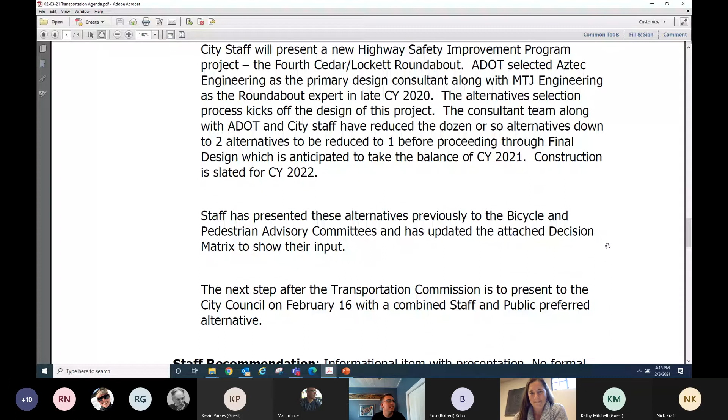Perfect, thank you. I think we cover most of what's here in the agenda in our presentation. Jeremy DeGeyter and I - Jeremy's in the Capital Improvements Group - are going to tag team this presentation. A couple of you attended the Bicycle and Pedestrian Advisory Committee combined meeting a couple weeks ago. We did essentially the same presentation, got some really good input, lots of questions. That was a really useful meeting.

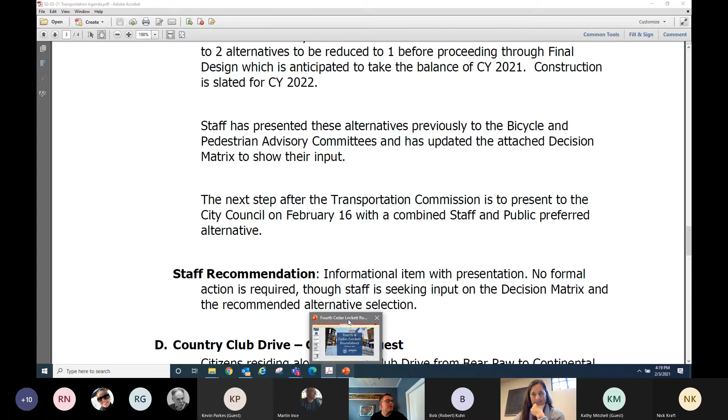So we'll run through this - it's a lot of slides, we'll try not to go too slow. If you have questions as we bounce through the slides, just stop us rather than having to go back later and find the slides. When we get to the end, we have a decision matrix where we've made an attempt to score the alternatives, and as the chair mentioned, that's what we're looking for - your input on the decision matrix so that we can have a preferred alternative heading to City Council here in 2 weeks from yesterday. That's our goal. With that preferred alternative and concurrence from City Council, we'll be able to turn our designer loose on the rest of the design for the project. So exciting spot to be at.

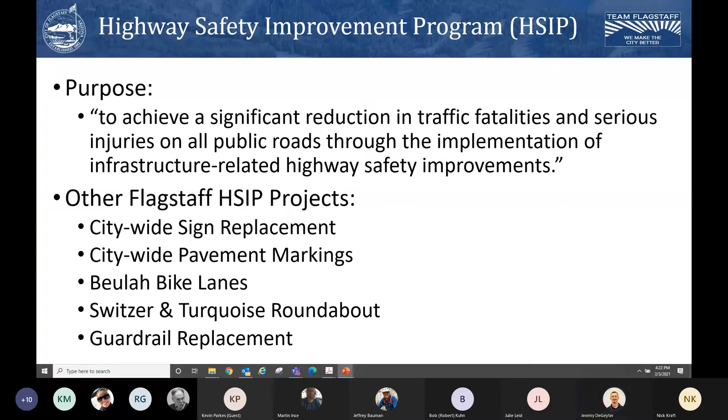A quick overview of this grant process: it's a competitive process administered by ADOT, as they administer the federal dollars. Back in 2018, the City of Flagstaff applied to ADOT and we were selected, receiving a notice of award. After that, it went to the Metro Plan's Technical Advisory Committee and Board, who implemented it into their Transportation Improvement Program, or TIP.

From there, we drafted an IGA, an intergovernmental agreement, between ADOT and the City of Flagstaff. This IGA was approved by City Council at the May 19th, 2020 City Council meeting. From there it goes to the ADOT State Transportation Board for approval, and then ADOT oversees the administration of the design and construction.

ADOT has hired the designer, in this case Aztec Engineering Group, and that's the phase we're in right now: design. Eventually, the city will be responsible for acquiring right-of-way, and ultimately ADOT will hire the contractor and administer construction of the project.

A quick overview of where this project is located: at the intersection of 4th Street, Cedar Avenue, and Lockett Road. 4th Street runs north and south, while Cedar Avenue and Lockett Road run east to west.

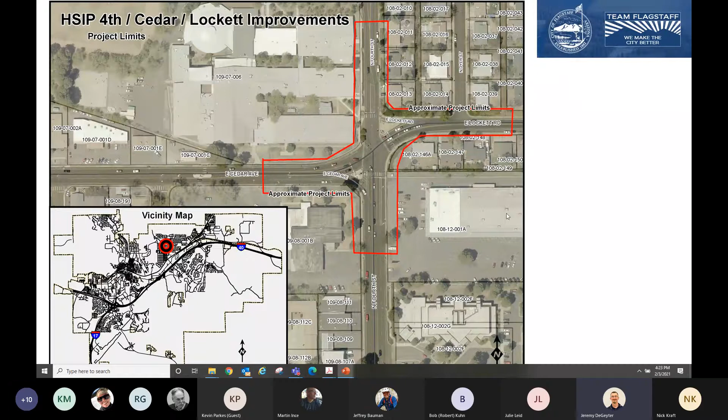For further orientation, on the northwest corner we've got Mount Elden Middle School, or MEMS. On the southwest corner, we've got Pine Forest Charter School. And on the southeast corner, we've got the CCC campus and the East Flag Library.

This is the early schematic design that was submitted along with the grant application.

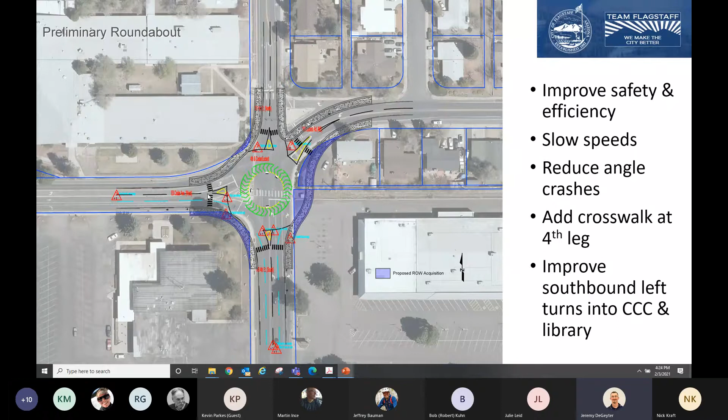The primary objectives of seeking this grant award were to improve the safety and efficiency of the current signalized intersection. This would be achieved by slowing speeds through a roundabout, significantly reducing right-angle crashes. It would add a crosswalk—currently we're missing a crosswalk on the 4th leg—and it would also help improve southbound left-turn lanes into the CCC and library property.

As for financial impact, the total HSIP grant award is roughly $1.9 million. The city also contributed roughly $60,000 in matching funds.

Ultimately, we'll be moving into construction hopefully later in fiscal 2022, and that's when the bulk of the money will be released for use. The primary thing I want to point out here is that the city is responsible for any project costs in excess of the current grant award, which will become more important as Jeff walks you through the alternatives, since there are significantly different costs involved with right-of-way acquisition.

And with that, I'll turn this over to Jeff, who will talk you through the basics of roundabout design and considerations.

And as I mentioned at the end of the presentation, we have a decision matrix with a bunch of rows to score different characteristics of traffic flow, pedestrian flow, bicycle flow, right of way, and all sorts of things. With the presentation, there's a couple handfuls of slides to go through these things, trying to educate and inform you on the types of things you'll see in the decision matrix.

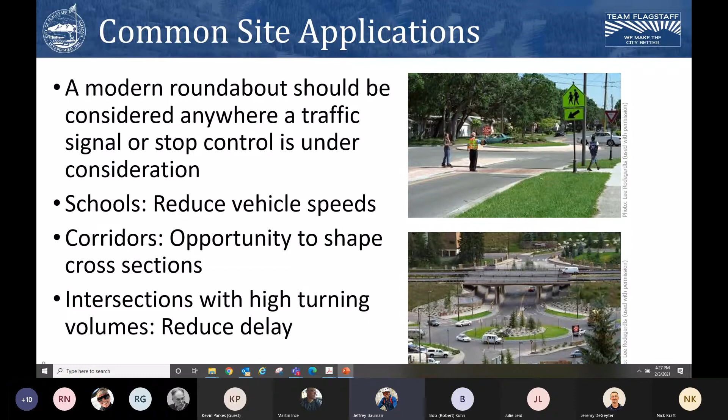Roundabouts do a really good job with left turns, which are really a problem at a traffic signal—they take up a lot of time, and there can be a lot of right angle crashes. Roundabouts do a great job with high turning intersections or high turning locations.

Key objectives: slow entry speeds, as I mentioned before, really low operating speeds. The appropriate number of lanes is really important for roundabout design—is it a 2-lane entry, which is more complicated for drivers and pedestrians, so we're always trying to limit to 1 lane if possible.

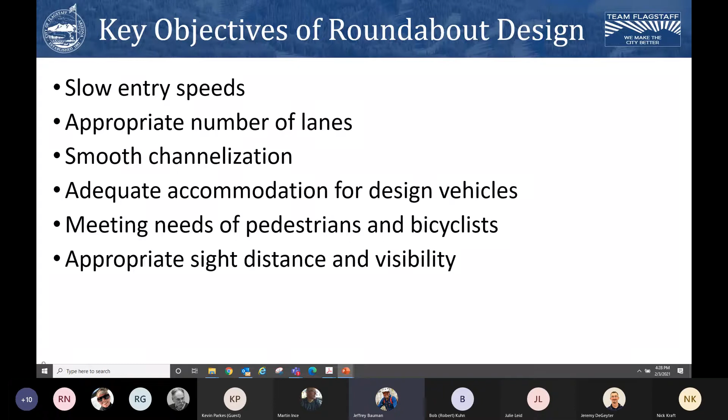Smooth channelization—we want really nice smooth flow. Adequate accommodation for design vehicles, which are typically the bigger vehicles, for example buses and large semis in this location. We always want to meet the needs of pedestrians and bicyclists, which we'll go through in some detail. And then appropriate sight distance and visibility, an important design consideration at all intersections.

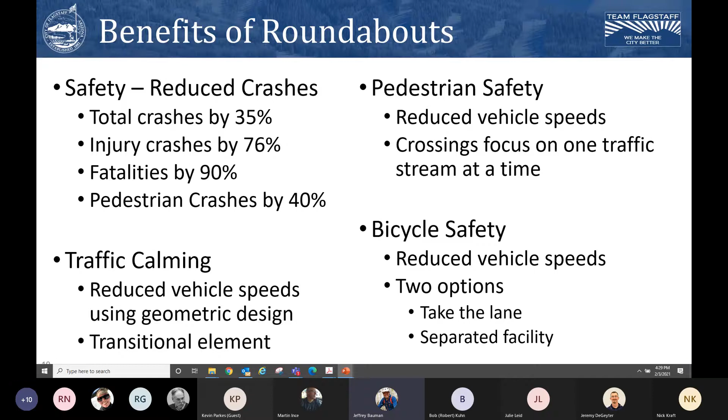Traffic calming—again, reduced vehicle speeds. That's a theme of roundabouts, and they can be a transitional element from one land use to another. And finally, bicycle safety—again, vehicle speeds play such a critical role in roundabout design. With bicycles there are two options: the bicycle can take the lane, a share-the-lane opportunity, or exit into a separated facility, as we're proposing in this design. I'll show some pictures of those.

More benefits: lower overall delay than other controlled intersections. In this early analysis of this location, each of the roundabout options we're looking at performs better than the traffic signal as far as delay for vehicles.

Specific users do not receive priority. So we're looking for gaps—all modes are looking for gaps in traffic before they enter the roundabout, yielding on entry, as opposed to assigning right-of-way like a traffic signal where people wait until it's their turn by that assignment.

Typically you see lower operating and maintenance costs. Average costs you find are about $10,000 for traffic signals, for ongoing maintenance of the equipment and electricity. A lot of those costs are not borne with a roundabout.

Another interesting thing here: roundabouts don't require long turn lanes. At a lot of intersections in urban areas you see lengthy left turn lanes, sometimes dual left turn lanes, right turn lanes. Typically you don't see any of those things at a roundabout. So while the roundabout takes a little more space at the intersection itself, overall it may not actually need more right-of-way than a traditional intersection.

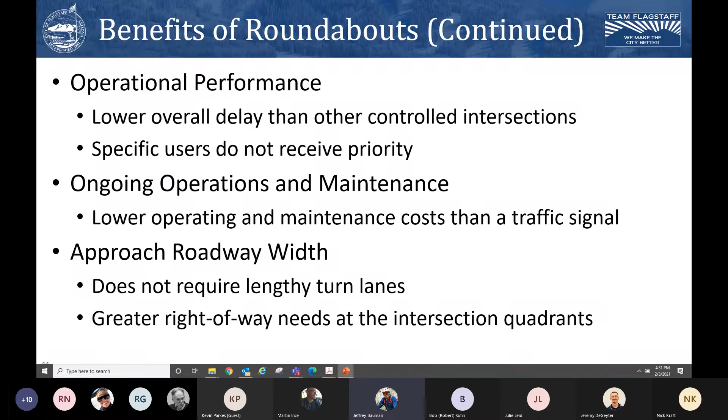Some environmental benefits with that reduced delay. The fuel consumption is typically lower, and air quality or emissions are typically lower, and there's typically less noise because you're not stopping and starting from zero. You're yielding on entry, so cars are moving slow into and out of, which means a little bit less noise.

Access management. Roundabouts are often used with access management, where we're restricting turns in and out of driveways, typically left turns. If you restrict left turns into and out of driveways, then you need to provide a spot for people to make a U-turn, so roundabouts are often used for that.

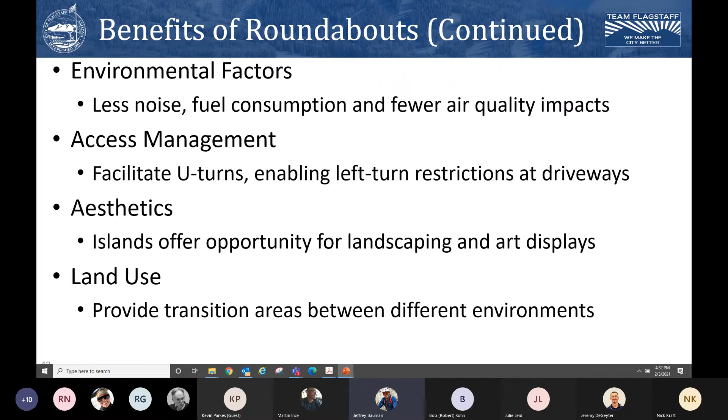Aesthetics, islands - you've probably all seen roundabouts with really nice central islands. That's actually one of the things that varies between our different alternatives that we'll take a look at. And then again, there's the transitional piece between different land uses.

Going into a little more detail, though I've kind of already touched on this - motorist considerations, there's improved safety. Part of that is because you're allowed more time to make decisions, to act and react because of the lower operating speeds and the reduced number of directions of conflicting traffic. As we were talking about with pedestrians, vehicles have just one conflict point - you're always looking left as you yield on entry - as opposed to a traffic signal where you may be judging several movements, significantly more conflict points with a traffic signal than a roundabout.

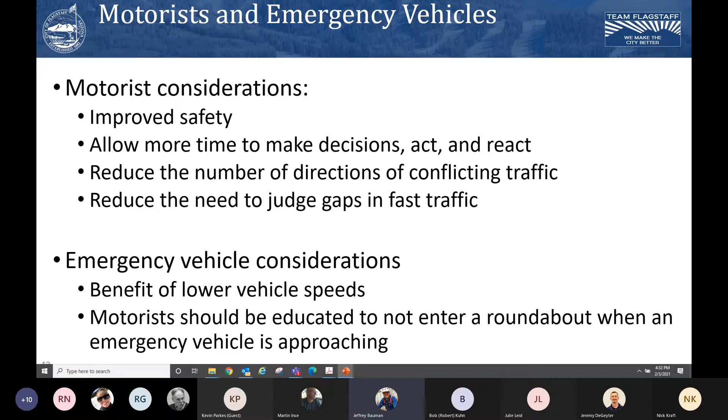Emergency vehicles benefit from the lower vehicle speeds. One thing that's important is that motorists should be educated not to enter a roundabout when an emergency vehicle is approaching, so as not to lock up the roundabout.

Pedestrian characteristics: again, one direction of conflicting traffic at a time, and we have lower vehicle speeds. There can be challenges for pedestrians with vision impairments, like at many other locations that don't have signal control - stop intersections and other places also have some of these difficulties.

Bicyclists can navigate roundabouts either as a motor vehicle taking the lane, or there are exit ramps to get into the separated protected facility, whichever name you'd like to use for it - a wide sidewalk that goes around the intersection. We'll look at some pictures of that here in a moment and talk about how bikes can traverse a roundabout.

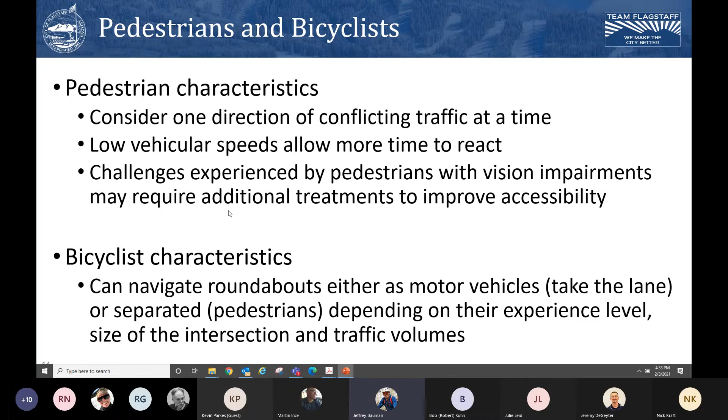Here's an exhibit with a typical roundabout corner. Sidewalks at roundabouts should be set back from the circulatory roadway, as you'll see in our designs. This is the sidewalk - typically we're looking at a wide sidewalk of about 10 feet, which is what we have in our designs to date. Then we have a buffer, often about 5 feet, which I believe is what we're looking at in some of the quadrants. That's one of the differences between the different roundabout concepts we'll look at - some have the buffer, some do not.

Separation improves comfort and also can discourage pedestrians from going to the central island. Some early roundabouts in the United States had really nice things in the middle, statues and whatnot, and we've had some issues - not in Flagstaff, but in other places - with pedestrians going out to take pictures.

The really important thing for safety: crossings are always one direction and typically one lane. So as a pedestrian, if you're on this side you're looking left, you just have one approaching lane to negotiate to find the gap. Typically the crosswalk is placed one vehicle length back from the yield line for the vehicle entering the roadway. The idea is that a vehicle crosses this conflict point with the pedestrian and then has time to react to the conflict point with the circulating vehicles. If they're waiting here to enter, they're behind the crossing - there's a couple of different things going on there that make it really important to get that one vehicle length right.

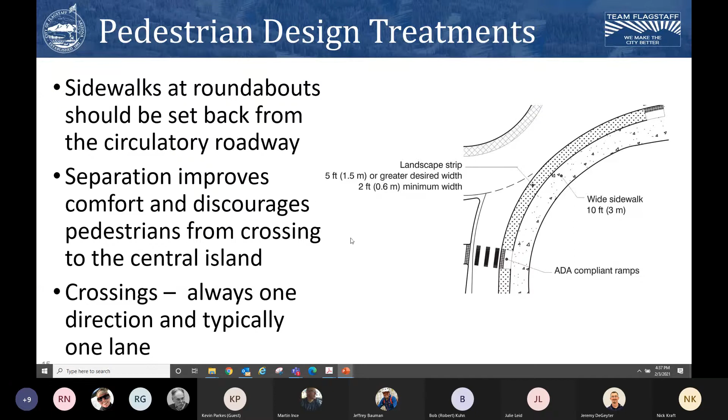So that's taking the lane, traversing the roundabout as a vehicle. We don't have any images in Flagstaff of this, but we'll see examples later in the presentation where shared lane markings go in the roundabout and the approach lane to reinforce to both drivers and cyclists that this is the place to be. If you're not comfortable with that option, there's an exit ramp essentially.

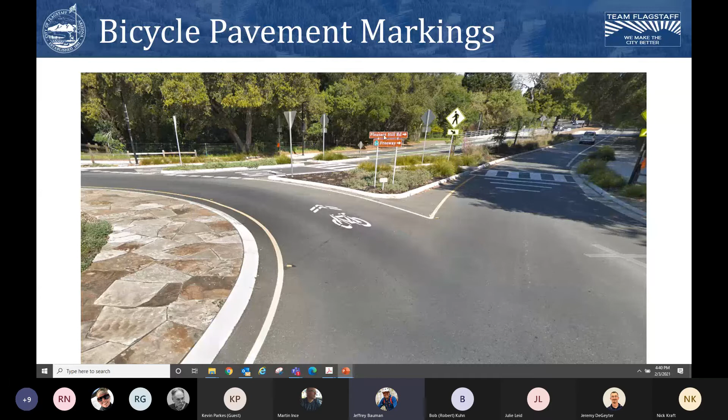You can see here the shared lane marking in the middle of the road in the circulatory roadway, and over here they've actually added the word legend 'yield' as you come up to the yield line. So there's an example of some of the signs, Commissioner Kraft, that you were asking about. Here's also some signage telling you to the freeway, and this must be Pleasant Hill Road—these signs are somewhat optional, but we tend to use them as well.

Here's another couple of examples. This is called a protected intersection, where the bike lane is buffered from the road with this hatched out area. Similar to the roundabout, the bike lane would come up onto the sidewalk, and when it gets this extra width, it becomes kind of a multi-use path.

This is a bit complicated with all of the green, but you can kind of see what cyclist paths would look like if you were going straight through. You'd follow the green, go through this crosswalk because that's a pedestrian conflict, and then head out this way.

This is a protected intersection, so it's not quite the way a roundabout would look, but the concept we liked is that in the roundabout we actually stripe the bike way a little bit different than we do the crosswalk. So we have a pedestrian section and a bike section in the crosswalk area. It's a concept we like from this protected bike lane, protected intersection concept.

Over here on the right is another example where the bike lane is potentially buffered or protected from the road. Instead of being an on-street bike lane, it's an off-street bike lane adjacent to the sidewalk. You can see in this concept the bike can use the crosswalk here or circulate around, whether it's combined with the sidewalk or at a different elevation, and then cross here. So I think we can incorporate maybe one or both of these concepts into the typical roundabout bike markings where you just have the crosswalk.

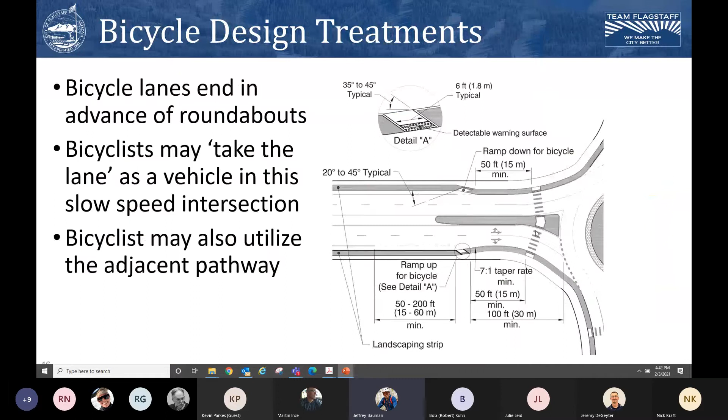So we're kind of excited to try introducing some of these concepts to Flagstaff. These are not very widespread at this point, so that'll be kind of fun to be one of the first to introduce some of these concepts.

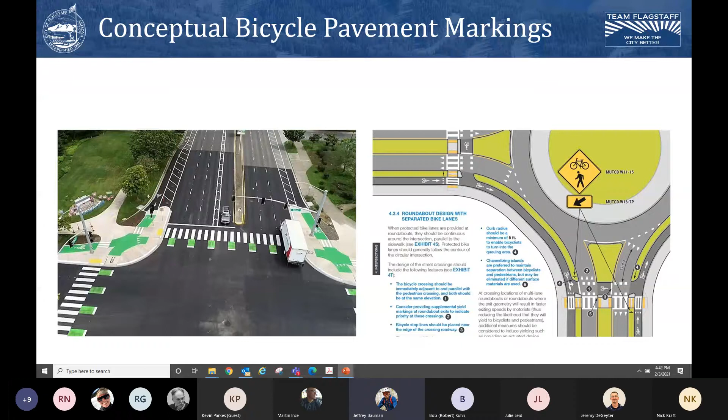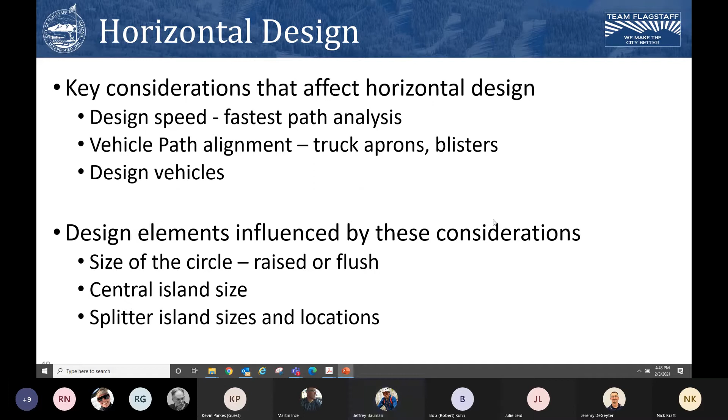Horizontal design, key considerations, again, design speed. It's all about design speed and reducing conflict points, which is what makes roundabouts so much safer than traditional intersections. Size of the circle, central island size, splitter island size—we'll look at all those things when we get into some of these examples, and here we go.

The designer has been working for a couple of months now and has come up with a dozen or more alternatives. Here's a couple of the alternatives, and these particular exhibits are showing how buses on the left and trucks on the right traverse the roundabout. So let me walk you through this a little bit—they're small, but just to give you an idea of what's going on.

You can see in this example the bus working its way around to make a left turn around this central island. This central island in the dark area is non-traversable—this is the potentially landscaped area. Then this lighter gray is what we call the truck apron, the sloped area that we expect trucks and buses to have to traverse.

The reason we have that is to keep the circulatory roadway for all the other vehicles skinny to help control speeds. If we built the island way back here, we'd have really high speeds for vehicles because it'd be just a straight shot through the intersection. So that's the balance going on here. You can see in this exhibit the truck actually runs over the landscaped area—this is still an early design concept where we haven't quite adjusted all of these areas yet for these design vehicles.

Just another example of some of the truck and bus movements through one of the other concepts. This is a double roundabout, and you can see this roundabout is all light gray, meaning it's fully traversable. Similar to what we built at West and Arrowhead, the central island is actually fully traversable and painted—essentially, not quite paint, but like paint. This island has some landscaped area but is traversable on the edges.

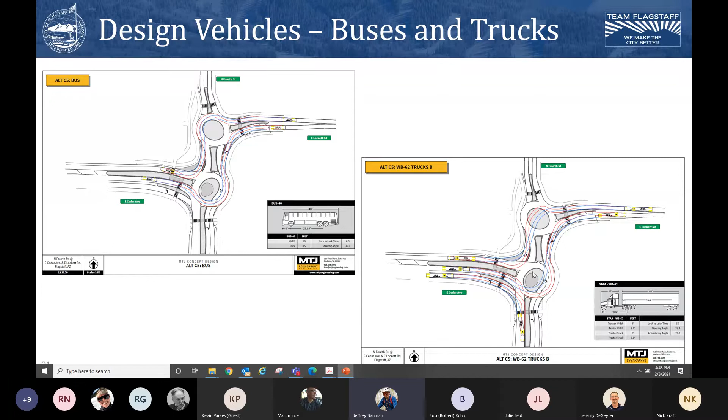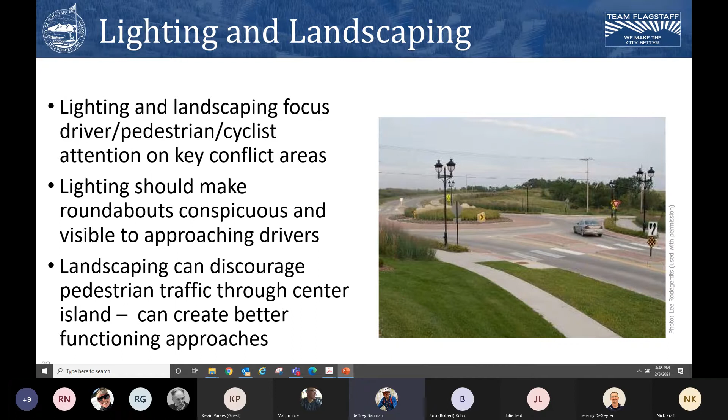Lighting and landscaping. Lighting is really important. Typically at a signalized intersection, we'd have 4 luminaires, 4 lights. At a roundabout, we end up with 8. They're typically not quite as big as the signalized intersection, but in total we're definitely using more light at a roundabout because of the various conflict points and because we have all the yielding, we are not assigning right of way with red, yellow, green, and walk, don't walk. So we like to have lots of illumination, and turning vehicles, headlights don't work quite as well. There's a couple of reasons why we like to have more illumination at roundabouts.

A couple more concepts here before we move into the examples. Right turn bypass lanes, similar to those used at conventional intersections, and we have one of those in our concepts. Again, access management. Bus stops can be provided on the entry or exit side of the roundabout, but not, of course, in the circulatory roadway.

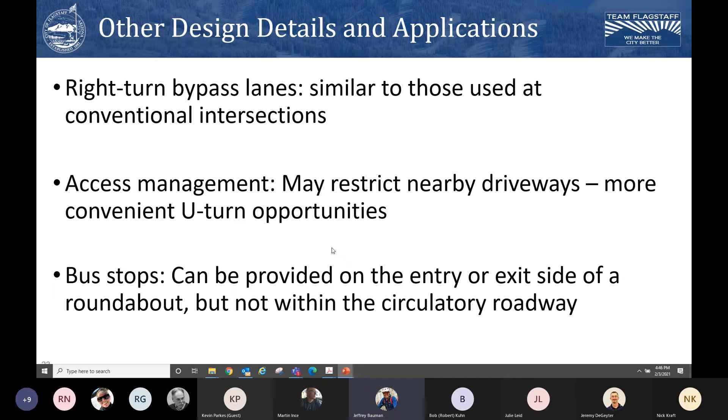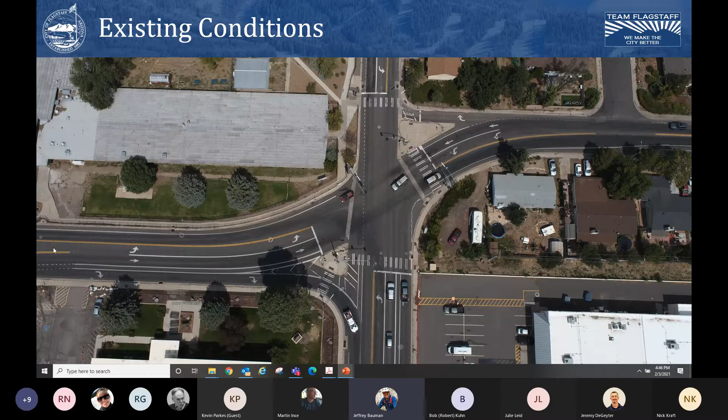Here's our existing conditions. Again, we're missing the crosswalk to get to MEMS, Mount Elden Middle School, on this quadrant. We do have the crossings all the way around, and to make up for this crosswalk we installed a mid-block crossing at Allen Street with a rectangular rapid flashing beacon. Jeremy went over that a little bit before, and I think most of you are familiar.

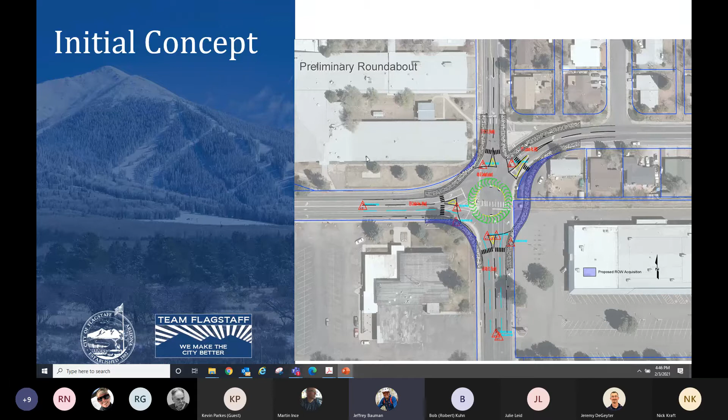Here's the initial concept that we put together, the city put together quickly for the grant application. A basic circle, kind of looks like a roundabout, but as you'll see when we got a full-fledged roundabout expert, it starts to look quite a bit different.

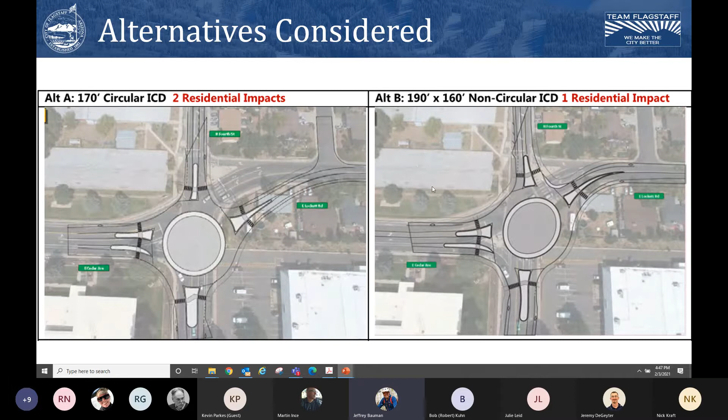As I said, we had a dozen or so concepts. Here's one of the simple ones, kind of like what we drew with a circle. Had a couple of residential impacts. We're starting to get non-circular and a single roundabout. There's one residential impact you can see here. These are just some of the early concepts, so I'm going to jump through them so you can see the evolution of our thinking.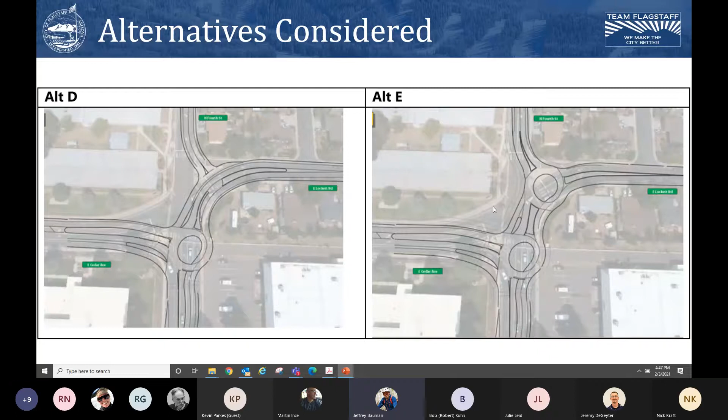We also looked at just a single small roundabout and then just left turns onto 4th Street. Some operational concerns with this concept, but we did look at it. We also looked at curving the two roundabouts so they weren't aligned anymore, to help with some of the vehicle path issues. So finally, here's our couple of alternatives that are still in the running.

And I can stop here if you have questions about this one, or I can go a couple more slides and then we can back up if people have more specific questions.

Commissioners, any questions for Jeff right now, or shall we continue looking at additional slides?

Let's continue. Give it just a couple more seconds here.

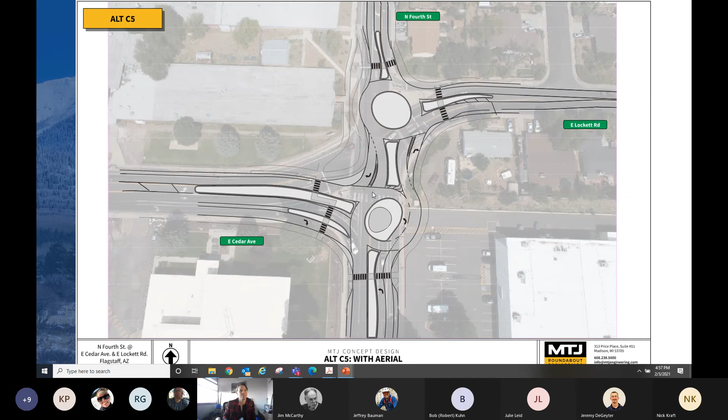So just a couple of things looking at this, and it gets a little bit to what Julie was just talking about, the volume of the road. And I really question whether or not we need the 2 lanes for this portion of the roundabout. I know you said it makes sense because that's what exists, but I think there's trade-offs for bike and ped in having the 2 lanes, especially as a biker coming west to east through this roundabout. I think 2 lanes makes somebody need to be very confident on a bike and stay in the lane. And the way the ped crossings are designed, that's also not great on a bike. So I think there has to be a balance there. And I think you could save right of way if you changed that down to 1 lane.

I also find drivers get confused in 2-lane roundabouts. And so again, just keep it simple. I also really don't love the slip lane that's on the southwest corner. Sorry, I'm having directional problems today. On the southwest corner, that movement can be made through the roundabout already. And so again, from a bike-ped perspective, you're just keeping traffic moving fast. And I think that's defeating some of the purpose of the grant, where we said it was to slow cars down. I think it would make it much easier for bikes and peds.

And so I think my comments generally align around our priorities, right? And what are we trying to move forward here? I'd like to see bikes and peds elevated in the priority. I think a lot of this is still designed around car movement, despite that. And I hear wonderful things you guys are working through on bike-ped pieces, but I think it's still prioritizing the car. I'd like to see things done, even if they impact car movements, that make it easier for bikes and pedestrians here. Generally, I think we're excited to see a roundabout, prefer that to other alternatives coming forward, and think it's a great project, and congrats on getting the grant to the city. And I also just want to say, I think these are the kinds of things that I really want to see coming to the commission and getting the chance to weigh in early. So just thank you for that.

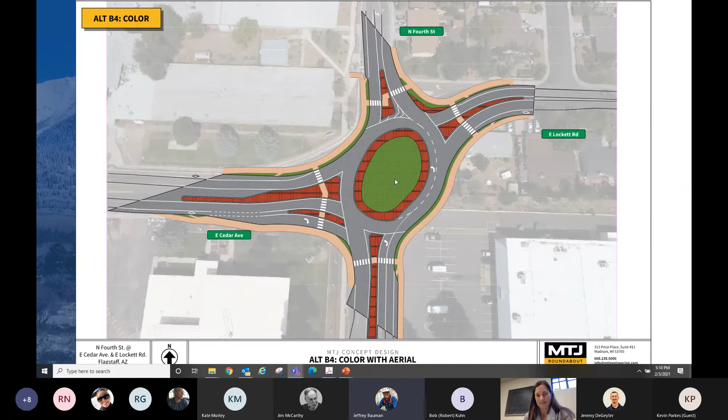Let me jump in on just one thing on the landscaping. Obviously this is all just shown as green area, kind of turfy looking. With our Highway Safety Improvement Program grant, we don't have any money in the project for landscaping, but that's okay. We're going to do the same thing that we did at Schweitzer and Turquoise - put in irrigation sleeves out to these different potential landscaped areas. And then we work with another department at the city who's pretty excited, and they'll work with BPAC committee and come up with a concept for this. That's kind of where we're at with Schweitzer and Turquoise. So you won't see any cool landscaping with our project design, but it will come the year after we build. Just wanted to touch on that.

So yeah, let's jump into the matrix where we can have some organized discussion about all the different concepts and go through line by line. And I think Jeremy is going to take it away from here.

Very good. Thank you, Jeff. Thank you, everyone. We appreciate all this feedback, that's why we're here today. And just to build on what Jeff just said, we have had those initial conversations with beautification staff about getting on their upcoming program for essentially beautification of that center island. As Jeff mentioned, it won't happen until after this project - it won't be directly, but we will work with them to accommodate as we can the future improvements.

So, all right, we are into the decision matrix. At this point I'm going to run through this hopefully pretty quick - I think we've got 4 or 5 slides that this is broken out into. So we did consider quite a few things, and pretty much at this point we have included the existing signal. I'm not really going to talk a ton about that, I'll point out a few things about that. This is really about us comparing the 2 roundabout alternatives that we have presented.

Our first evaluation criteria was just the geometry and complexity, and I think it's apparent to everyone who has seen these that the double roundabout is significantly more complex than the single.

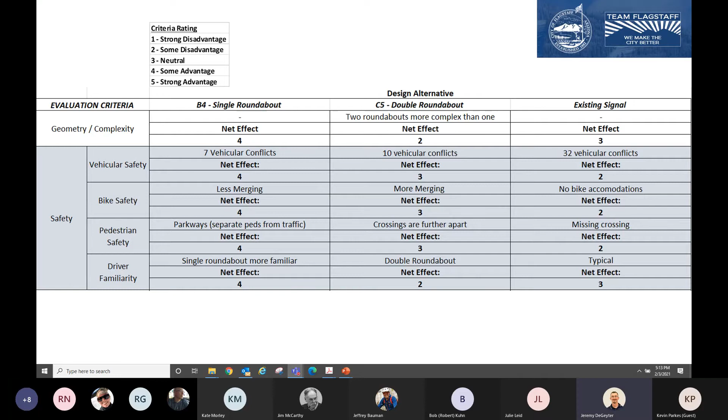Constructability - single roundabout does score a little bit higher. Double roundabout may be a little bit more complicated when it comes to phasing and traffic control during construction. We haven't really gotten to the point where we're talking about what kind of allowable closures might be available, but again, double roundabout scores slightly lower.

And then, of course, we've also looked at operations. Within operations, we've looked at automobiles and buses and their level of service. Certainly, how's this going to feel to bicycles, how's this going to feel to pedestrians, and then from a purely analytical standpoint, can this accommodate the design vehicles that we have? In general, this is a bit more of a mixed bag.

The design, as Jeff alluded to earlier, the double roundabout actually has, from the preliminary modeling, some better level of service. It's better for the morning AM peak hours and similar in the afternoon. But both of the levels of service are acceptable and better than the existing signal. So in this case, double roundabout scored a little bit higher.

Bicycles - mostly from a complexity standpoint and so on, the single roundabout did score slightly higher. You don't have to deal with the...

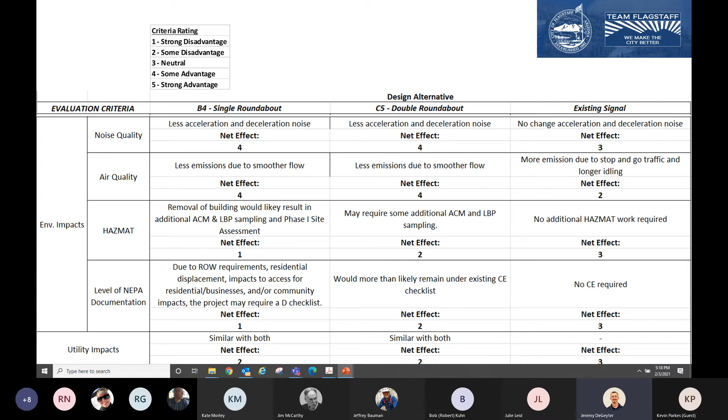Moving on, utility impacts are not entirely known. We know that based on existing utilities there will be some relocations required, but there's no real advantage with either of the alternatives.

Access management, as Jeff mentioned, roundabouts provide us many more options, using median islands and so on, restricting left turns, but also allowing for relatively easy U-turns in close proximity. Both of these provide similar improvements when it comes to access management, so we've scored them similarly.

Right-of-way is the next one we looked at, mostly from a footprint standpoint. The single roundabout, as we mentioned, would take the entire residential property, so it's got a significantly larger expense to take the property, and we have scored that low. We never take that impact lightly — that's a major deal to take someone's home. So the single roundabout has been scored with a strong disadvantage there.

The double roundabout still has a significant footprint and will still need a significant amount of additional right-of-way, which will cost money, but we're not impacting a home in that scenario.

Then stakeholder acceptance — this is where we're really hoping to continue this conversation after we get feedback. When we went to the Bike and Ped Commission, the single roundabout was clearly preferred from a simplicity standpoint, with similar comments to what we've already heard here tonight. We did score the double roundabout relatively neutral, but the concerns were, due to complexity, how bikes and peds would interact with that more complex design.

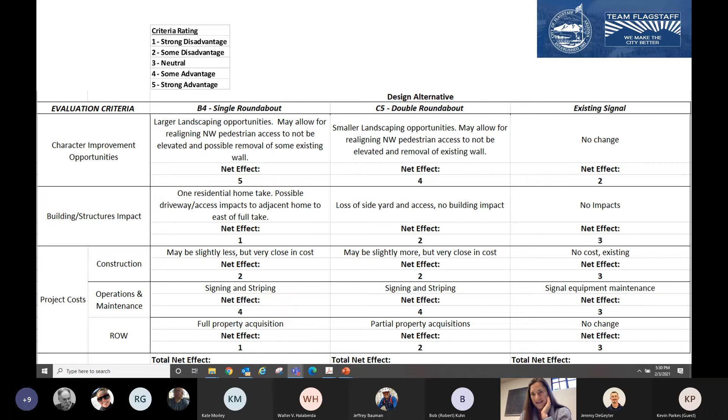Commissioners, let's discuss. Yes, thank you, Walter. Let's discuss the rankings, and I'd like to hear preferably from each of you your thoughts about the single roundabout, the double roundabout, and some of the other items that Jeff presented earlier related to design.

So I'm happy to kick that off. One thing on my mind, Jeff and Jeremy, is related to construction and the sequencing during construction, and how a roundabout would be built in this location while still maintaining traffic flow. I know sometimes that can inform pieces of the design and how it's sequenced. So that's something on my mind for further along, to minimize that impact during construction.

Again, I like the idea of some strategies with striping. I really liked the separated bike lane idea if there is adequate right-of-way along those edges, and I speak to this really leaning towards the single roundabout. It seems to me the single roundabout has the opportunity to maybe enhance some of those edge improvements to really prioritize or give equal favor to bike and ped movement like we do to vehicular movements. So those are my thoughts.

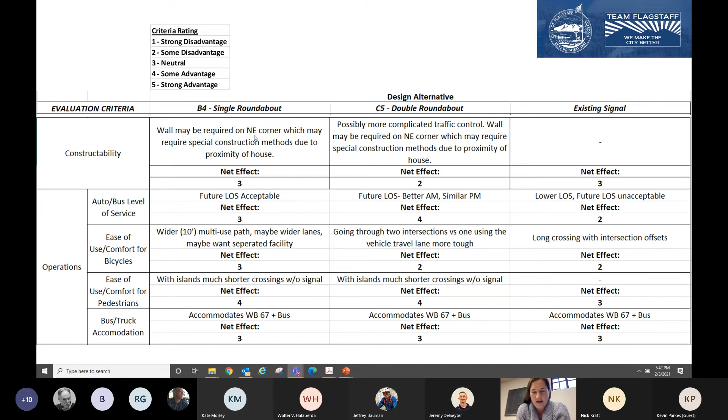I think that's a nice wrap up to this agenda item. I've heard from everyone on the commission that the preference is the single roundabout, but to look a little more closely as the design develops at the bike and pedestrian facilities, and see if there are ways to improve it, to bump up those scores and have a strong advantage in those categories for the single roundabout. So unless there is further discussion, that is our recommendation.

Is there anything else you'd like to hear from us, Jeremy and Jeff, before we move to the next agenda item? Do you want to venture a number for your row for the commission? The pedestrian and bike advisory committees went with 4-3-2.

Where would you like to be beyond just saying the single was favorable? I would say 5 for a single and 3 for double. I could go with that, or 4 for single, 3 or 2 even for the double. I think it's confusing, and then I guess the existing signal is neutral in the categories.

I guess, how do you put that together, Julie? I'm inclined to do a 4 for the single, only because of the full take on that resident. Otherwise it would be a 5. I think, in my opinion, 4-3-2.

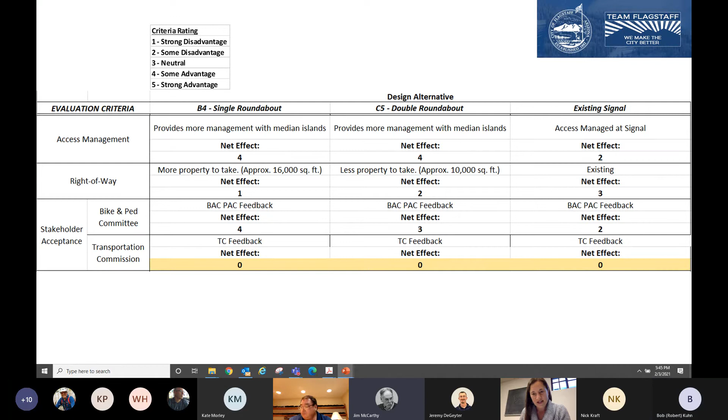I would like to move to the next agenda item, D, Country Club Drive. This is a citizen request from citizens residing along Country Club Drive from Bear Paw to Continental, with concerns about speeding and general safety of vehicles along that section of roadway. We do not have a presentation regarding this matter, but it was important to place this on the agenda because we've had quite a few contacts related to issues and concerns in this area.

I would like to give my commissioners a little bit of context here, if I could share my screen. I have Google Earth open to have that in front of us, of the area specifically that we're talking about. Is that okay, Jeff? Yeah, take it away.

All right, commissioners, can you see my screen? Yes, I can. So here we have Country Club Drive. This is the driving range, the putt-putt course, Old Walnut Canyon Road. The traffic interchange is a little bit up to the north.

So as you may know, this is kind of the pinch point, the narrowing, and then it goes into a more residential area on Country Club Drive. The area of concern is specifically from Continental, which is this intersection right down here, to Bear Paw. So that's Continental, and this is Bear Paw.

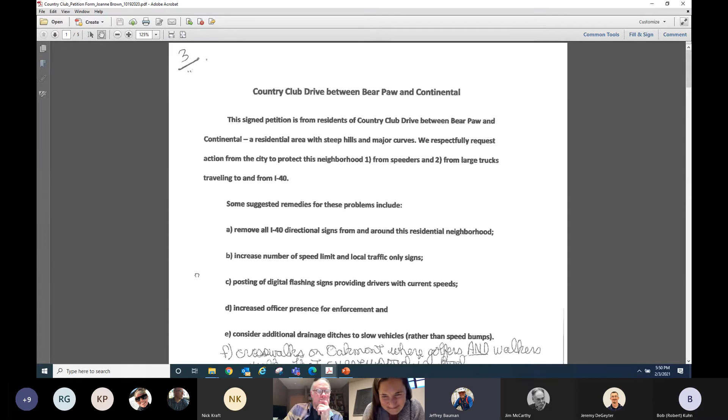So here's the petition that we received in October. Okay, so I'm going to read it aloud just for those that may have a smaller screen. It's hard to read. This signed petition is from residents of Country Club Drive between Bear Paw and Continental, a residential area with steep hills and major curves. We respectfully request action from the city to protect this neighborhood, one, from speeders, and two, from large trucks traveling to and from I-40. Some suggested remedies for these problems include: A, remove all I-40 directional signs from and around this residential neighborhood. B, increase number of speed limit and local traffic only signs. C, posting of digital flashing signs providing drivers with current speeds. D, increased officer presence for enforcement. And E, consider additional drainage ditches to slow vehicles rather than speed bumps. And then there is item F in here, handwritten: crosswalks on Oakmont where golfers and walkers walk.

That curvy road is bad. I believe I read that correctly. Okay, so what I'd like to do, we have some members of the public here in that community to speak with us. But first, before we go into that, commissioners, do you have any questions for staff at this point before we ask members of the public to provide some comments?

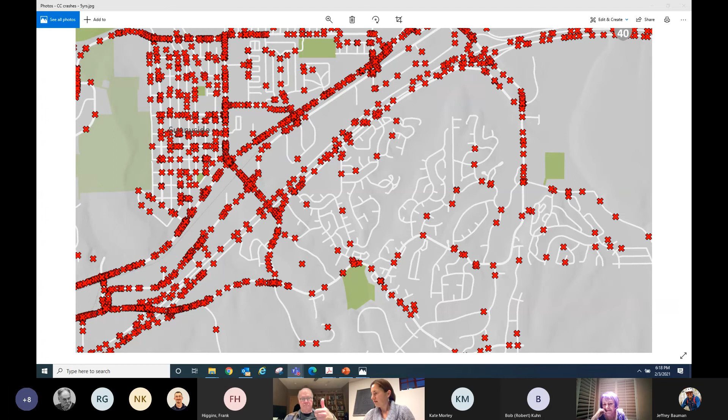We've got reports from the BAC and PAC. Links are provided in the agenda for you to refer to if you'd like. Martin, do you have any highlights that you'd like TC to hear this evening, if you are still on the line with us? I'm still here.

Thank you. Just real quickly, we've been working on finalizing our list of priority projects. Two things created an imperative to do that now. One is that the city's budget cycle moves forward, and we need to get our capital plans prepared and ready for the next year as well as the next 5 years, so we need to identify our priority projects. The second imperative is the grant that Mountain Line received for Federal Transit Administration Section 5307 and 5339 funds, which will bring $5.5 million in federal money to bike and pedestrian projects. So we've been working on identifying potential projects for that.